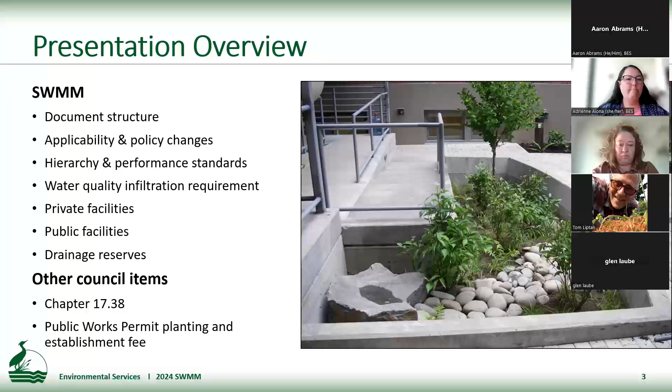So just to get us started, the Stormwater Management Manual requires stormwater management for development activities that add or replace impervious area. It applies in the right-of-way and on property. It also protects drainage ways on private property. We have these requirements to comply with our own regulatory requirements, to protect watershed health, and to meet our stormwater system needs.

Here's the schedule. The public comment period opened on Monday of this week. We're in our first info session today, and then we'll have another one next week on the 24th. The material will be the same for both of these presentations. The public comment period closes on August 19th. We'll be taking the code updates to City Council at the end of the month on the 31st. And then when all of this goes into effect on October 1st in the fall, we'll have a 3-month grace period for applicability.

So here's our new table of contents. You'll see it has a lot more chapters and sections than before. The goal here is to make it faster and easier to find the information that you're looking for. I'm going to highlight a few changes here. We've expanded the current Chapter 2 Stormwater Facility Selection and Sizing and Chapter 3 Private Stormwater Facilities across these 4 chapters. So Chapter 2 will now be focused on site evaluation and planning. This will include setbacks, infiltration feasibility requirements, and infiltration testing, among other things.

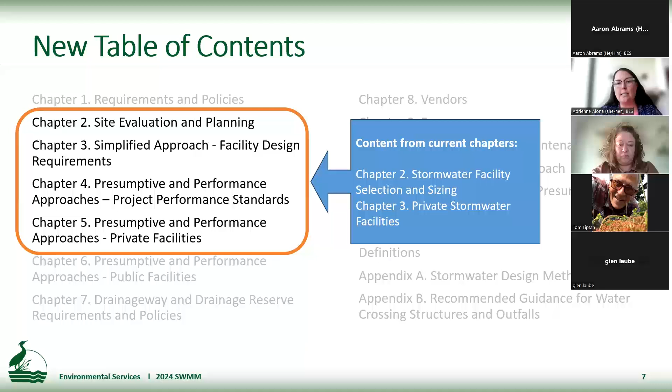Our new Chapter 3 covers the simplified approach. The simplified approach is a prescriptive design approach that is available for smaller projects that have 10,000 square feet of impervious area or less. This is the approach that's mostly used by contractors and does not require the involvement of design professionals like an engineer or a landscape architect. And so consolidating all of this in one chapter is going to make it easier for users to find this material. Because we've made that chapter, we've also separated out the presumptive and performance approach project performance standards into Chapter 4, and that'll be where more of the engineering guidance is held for those larger projects. And then we have the facility designs for those design approaches in Chapter 5.

We've also consolidated and pulled forms, standard operations and maintenance plans, and the facility details into separate standalone sections that will live at the end of the document so that they're easier to find. Right now, they're folded through the document in the chapters where you would find them if you were reading it cover to cover, but that's not how people access the manual. And so we're putting these in separate locations so they're easier to find.

Now I'm going to get into some of the policy changes. Our biggest policy proposal in this version of the manual is increasing the applicability threshold for which projects need to comply with the manual from 500 to 1,000 square feet. This threshold will be applied at the project, not just the site scale. So if you're coming through with a batch of residential building permits, this would apply to all of those as a group together. So it would be 1,000 square feet for all of them together added up, not on a tax lot by tax lot basis.

This change will decrease the number of building permits that will be required to comply with the manual by about 18%, while only reducing the overall impervious area managed by about 1.8%. And those numbers are based on review of SWMM permit data over a 10-year implementation period.

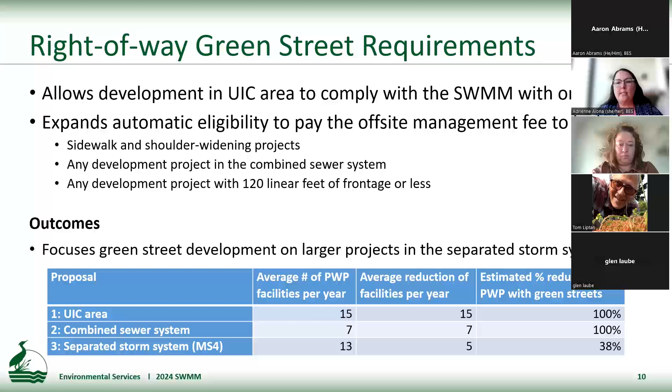We also have some proposed changes to the pavement exemption language. These are only the ones where we're changing the language. These aren't big changes, but it's mostly rewording existing language. We'll now go back to talking about standalone utility trenching projects, standalone base repair of public streets where less than 50% of the street is repaved. The big change here is this sort of mixed projects for other structural pavement repair.

So if you're doing a mix of things that requires pavement replacement, including reconstruction of a curb and the associated pavement restoration, base repair, and pavement restoration for excavations and trenching, when you've got a large project that has a mix of those things, when that area exceeds 40% of the road area, that's when you'll be required to comply with the manual.

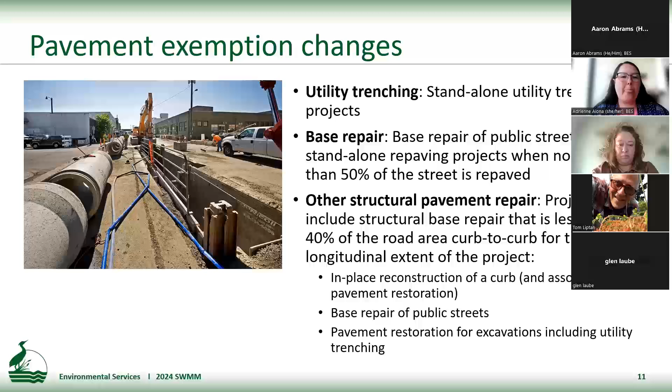Some other policy changes: we're removing the language from the manual that references the total maximum daily loads. That's because while the SWMM helps the city comply with our TMDL requirements, there aren't any additional design actions that are required for SWMM compliance to meet those requirements. So all of the standard requirements for facility sizing are the same. And so we don't need to call out the TMDL for specific water bodies separately.

We're removing the landscape non-conforming upgrade trigger. This is a trigger that results in a significant number of permit reviews, while very few actually result in an upgrade.

We're clarifying requirements for new connections and routes of conveyance. And for that in particular, we're outright stating that if you're building a new curb where one did not exist before, or formalizing a drainage system, that counts as a new connection or route of conveyance, even if that water ultimately ends up in the same place as it did before. We're also clarifying Port of Portland operations and maintenance recording requirements. So Port of Portland properties are not required to record O&Ms with the county against the property deeds. The city and the port will hold those records in our own records, not with the county.

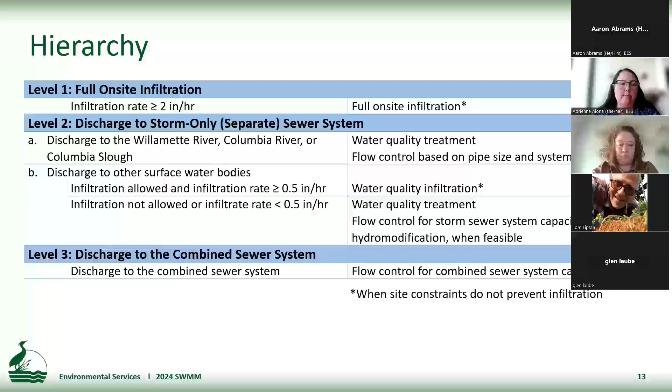All right, now I'm going to get into these performance standards. In this version of the manual, we're establishing this new terminology for performance standards, where we have like 6 performance standards and then the kind of engineering design requirements associated with them. So this is the summary of those. Kind of the key ones to look at here are the new one, water quality infiltration performance standard. That's to infiltrate the water quality storm event, which is 1.61 inches in 24 hours.

And then the flow control for the separate storm system, that is now going to be based on limiting the post-development peak runoff rates to pre-development peak runoff rates for the 2, 5, and 10-year 24-hour storm events. We've removed the 25-year storm event from that requirement. And then we've separated out this flow control for hydromodification, and that is focused on limiting the post-development peak runoff rate to the pre-development peak runoff rate for 1/2 the 2-year 24-hour storm event. And that requirement is designed to kind of protect stream channels from changes in the flows that they're seeing due to urbanization. Then the flow control standard for the combined system is not changing.

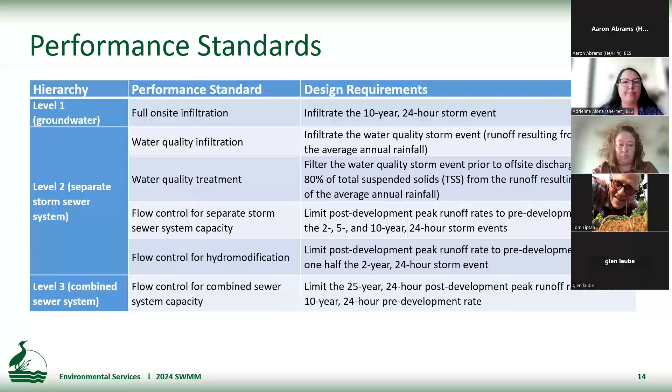So hydromodification is the change in the structure of a stream channel through usually kind of erosion and incision, because development changes the flow patterns off of a site. So water runs off differently from a parking lot than it does from a forest. And that change in the runoff patterns has negative impacts on stream channels. So we're doing it to minimize those impacts and to improve water quality.

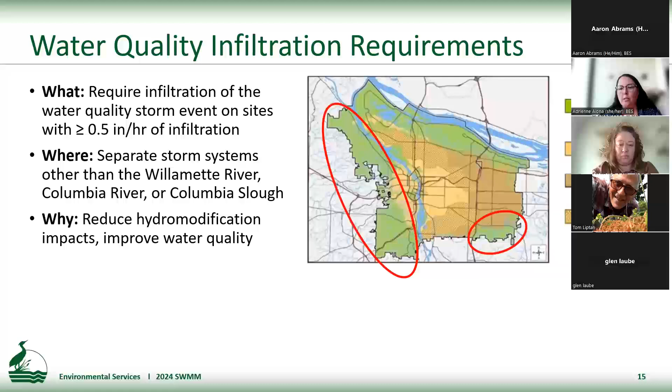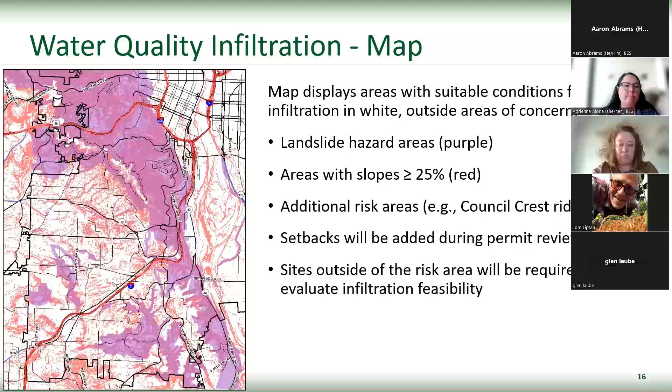The criteria for the infiltration requirement: the requirement will apply if there's an offsite connection. So you have to have the ability to connect to a storm system, which is not the case for every site in these parts of the city. The infiltration rate has to be at least a half an inch per hour, and other site constraints do not prevent infiltration. So all of the other reasons that you can't do infiltration on a site still apply. If you're within a setback, if there's contamination on your site, or if there's specific geologic conditions that are not identified on the exclusion map that can be demonstrated.

So along with this, we're also updating our water quality design storm. We are extending the hyetograph from 24 hours to 36 hours. So the duration of our new design storm is increasing by 12 hours. We're doing this to better match our actual rainfall record and particularly to better match the peak rates.

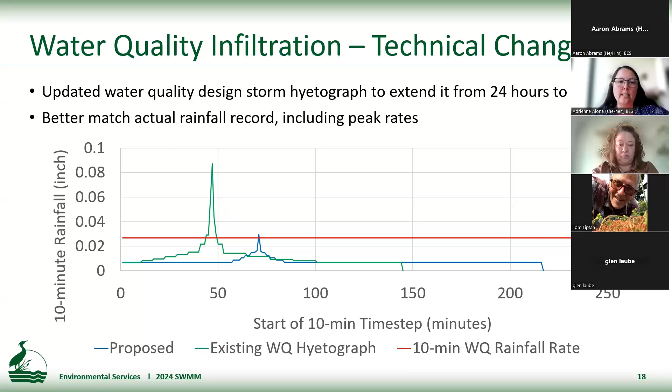So you'll see on this graph, the existing water quality design storm is in green. The proposed 36-hour storm is in blue. And then the red line is our 10-minute water quality rainfall intensity rate. So for facilities that are designed to manage the peak intensity, that's what that red line is. And then this blue line is the volume of the storm distributed over 36 hours. And we developed this through a rigorous statistical analysis of our historic rainfall record.

So now I'm going to get into some design updates to private stormwater facilities. We are restricting ponds to apply to public projects only. So we are taking those out of the list of available facility types for private development projects. We're removing subsurface sand filters as an option. This is a facility type that rarely gets built and isn't really needed. We're adding a new soakage trench detail with an overflow connection, and that will be used for when infiltration rates are between half an inch and 2 inches per hour. And we provided more guidance for large bioretention systems.

We've updated our setbacks for all infiltration facilities, setbacks from steep slopes. We've changed the definition of steep slope from 20% to 25% for the application of SWM setbacks. We've reduced the setback requirements for grade breaks and slopes between 25 and 50% that are less than 20 feet high. So the new setback requirements will be based on the height of that grade break. So the setback will be 5 times the height of the grade break or 100 feet, whichever is less.

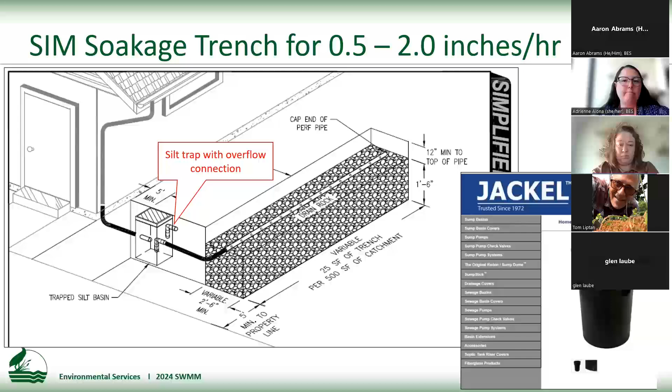We also have some changes for planters and basins for our water quality infiltration facilities, for planters, basins, and soakage trenches. So all infiltration planters and basins with under drains will now have an elevated discharge pipe at all infiltration rates. This will facilitate infiltrating additional volumes of water. We are adjusting the depth for our simplified approach aggregate layers. They are changing to be 6 inches of drain rock for the under drain pipe and then 3 inches of gravel for that filter layer. We're allowing corrugated HDPE under drain pipe and encouraging recessed under drains for our presumptive and performance approach facilities.

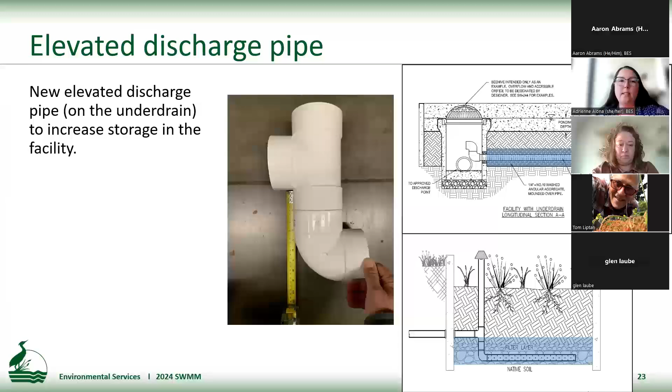Here are what the draft details look like for the elevated discharge pipe. Here's a potential elbow configuration to accomplish that. You'll see that elevating that discharge pipe increases storage in the facility, and particularly in these slower draining soils where this requirement will apply, that will really help those facilities infiltrate the amount of water that we're looking for them to do.

Here's the HDPE corrugated slotted drain pipe. This is a new pipe that we are adding as an acceptable underdrain material. The understanding is that the current underdrain material can be somewhat difficult to obtain. And so this material is widely available and will be acceptable for use for underdrains in private facilities.

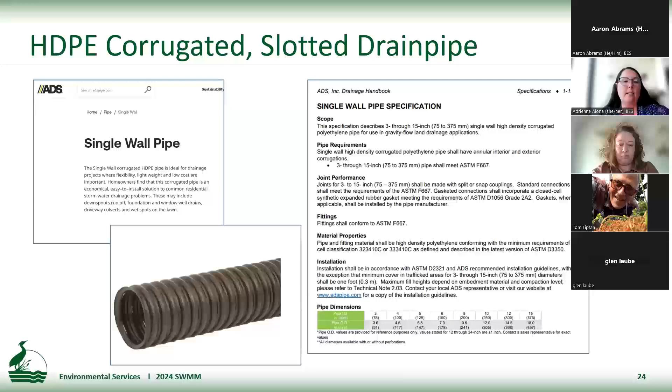We're going to be encouraging, but not requiring, the use of a recessed underdrain in presumptive and performance approach facilities. This is an underdrain that's placed in a trench below the facility instead of within the blended soil in the facility. It'll increase the soil volume within the facility and hopefully be better for plant health.

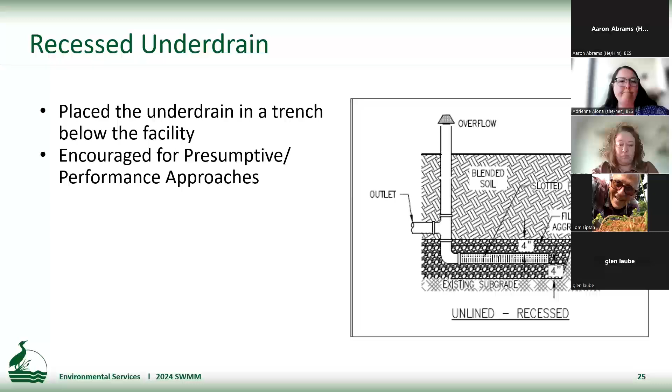For eco-roofs, pervious pavement and dispersion, we have some changes to these. We've updated and included guidance on how eco-roofs meet our specified performance standards. So how do you credit an eco-roof for water quality treatment or the water quality infiltration requirement? One key example of this is that the Central City eco-roof requirement requires 60% coverage of a roof. However, if you are in the separated storm system and water quality treatment is required, that 60% coverage does not meet that standard for the full site because the other 40% of your roof still needs water quality treatment.

We are recommending pavers for pervious pavement on property to avoid systems being paved over, particularly with pervious asphalt. It is often difficult to tell that that is a unique material. And so there's concern that repaving projects will result in switching over to standard asphalt, and then that will cause significant problems. We also have new guidance for allowing pervious pavement on slower draining soils.

For dispersion, we're clarifying that downspout splash blocks are by exception only, and updating our trench dispersion requirements and moving those from the appendix to the body of the SWM. Trench dispersion is a facility type that allows you to spread flows across a hill slope, and it serves as a discharge point for sites that do not have access to a storm system and cannot infiltrate the 10-year event. This was formerly called upland dispersion in the appendix, and we've just added a little bit more detail and guidance to that design approach and brought it into the body of the SWM.

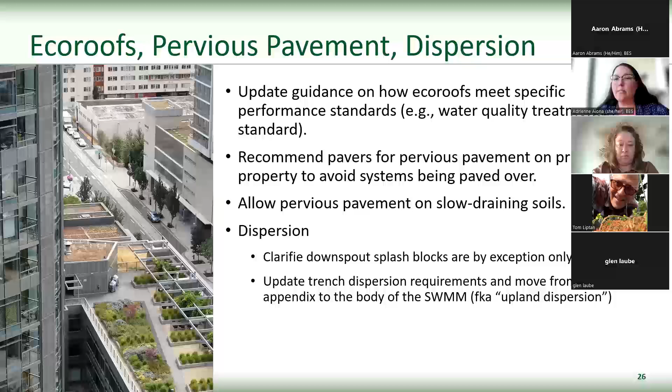We have some process changes. We are shifting operations and maintenance and drainage reserve notice of condition form recording. We're shifting the responsibility from the permit applicant to the city, and we'll primarily be implementing that in Multnomah County to start. But this should reduce the number of back and forths between the city and permit applicants, because often the operations and maintenance plan recording requires a few extra check sheets during the permit review process. To accomplish that, we have a new recording fee that's just a pass-through for us to cover the costs of recording at the county.

We are also creating the authority for BES to require construction certifications from the designer for sites where city staff cannot perform inspections. A key example of this is if you have a site that's doing flow control with an orifice, and that orifice is within a maintenance hole that city staff do not have the ability to access, or it would require confined space entry. For those sorts of situations, we will require that the designer provide a construction certification. It's similar to a special inspection, but that has a very specific definition, and so we're using a different term here.

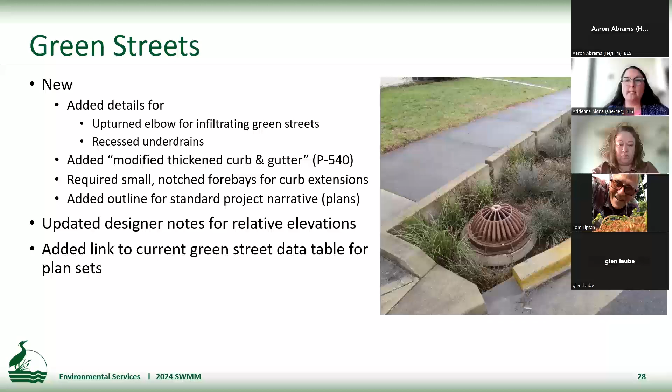We've updated designer notes for how to handle and communicate relative elevations within the facility to facilitate accurate construction. There are a lot of critical elevation points within green streets that are necessary for them to work properly, and proper construction is an ongoing challenge for these facility types. And then we're adding a link to the current Green Street data table for plan sets so that that is easily accessible on our website.

We have some significant improvements for lined facilities. We have some new details for liner attachments that better show how to attach liners in facilities with check dams and multiple cells. We have a new requirement in the construction specifications for the contractor who's installing the liner to test the seam seals after they're installed. They use compressed air to find any gaps in those seals. I guess it's a standard service that they provide that Portland has not required in the past.

We're also adding a requirement to protect the liner with geotextile fabric to help minimize the risk of puncture, particularly between the liner and the aggregate, the drain rock in the bottom. We're adding a new CG3 catch basin detail to use in lined facilities that are less than 5 feet wide instead of using a beehive. Trying to fit a beehive within a lined facility when it's only 5 feet wide doesn't leave enough space around the beehive to install the liner correctly. So instead, the catch basin will move to the edge, outside of the facility footprint. So you can have a nice rectangular box for your facility to install the liner, and then the catch basin will be on the edge at that planter wall.

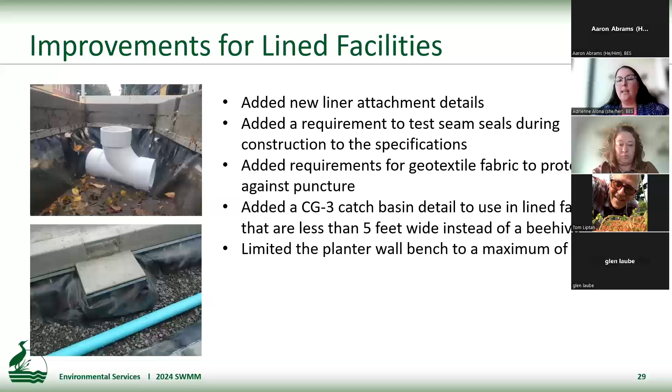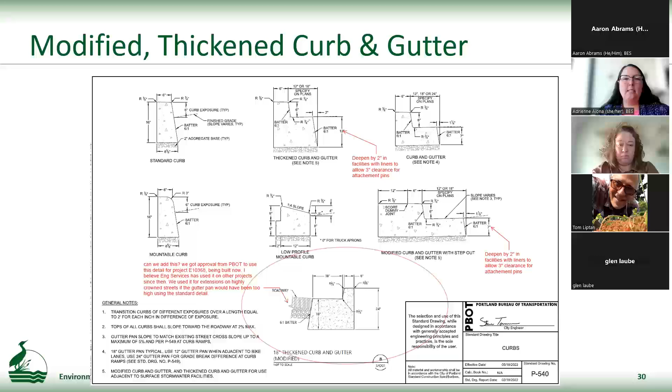We have some changes to public sumps for our UICs in the public right-of-way. We have 2 design approaches. The first is managing the 10-year peak flow with a safety factor of 2. This is the current design approach for public sump systems. The second, which is new, is to manage the 24-hour 10-year design storm with a safety factor of 2. That's a more modeling-heavy approach. It's been available for private sumps for a long time, and we are now adding this to our public sumps.

We have new design guidance and requirements for water quality sumps in the MS4 and the separated storm sewer areas. These will be required to manage the water quality design storm with a safety factor of 2. And because they are only infiltrating the water quality design storm, 1.61 inches, instead of the 10-year event, 3.4 inches, those will be required to be an inline configuration with a piped overflow back to the storm system.

We have new language to require checking for depth of groundwater when installing a second sump in series, to make sure that the first sump has an adequate separation from groundwater before installing the second one. And then we'll have an updated sump data table. I don't think this is it.

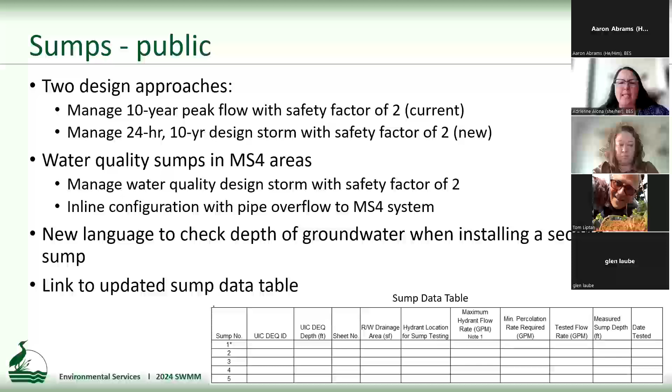We have new guidance. This is a brand new section for large bioretention systems. It's still general guidance at this time, and draws on the experience that the city has. We've been building more of these recently, notably on the Capitol Highway project. We have guidance on recessed underdrains and the importance of spreading the flows across the facility. Since these are so large, we really need that flow to spread out across the whole surface area so that the whole facility is activated and we're getting that infiltration through all of the soil.

And again, there's a particular focus on the need for an adequately sized forebay, to keep as much sediment out of the facility as possible, to ease future maintenance and keep the plants healthy and safe.

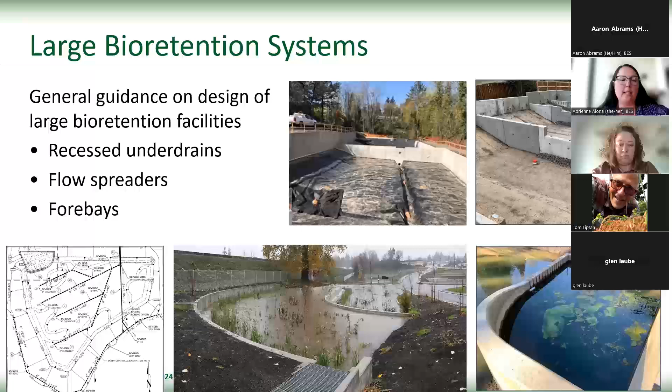Some other changes for filter strips in the right-of-way: we are promoting the use of a grass seed mix. The current language in the manual implies that you're required to plant it like a green street, and that's not really the intent.

We have 2 soil blends for green streets. The current standard blend is for simple unlined infiltration facilities. And then we have a new high fines soil blend for lined facilities, or facilities where the soil is not sitting on top of native soil, so when there's an underdrain, or when there's gravel across the entire bottom of the facility. This high fines blend we found better supports plant health because it has more mineral fines for the plants and also really helps retain moisture. We have also updated our plant lists and planting templates.

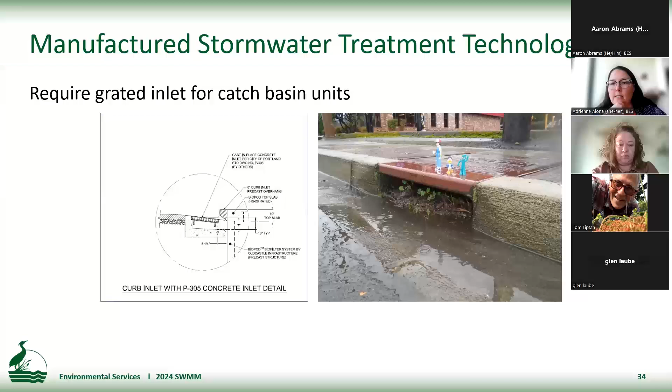For manufactured stormwater treatment technologies, we're going to be requiring a grated inlet for catch basin units. We're doing that based on experience we've had with some installations on Beaverton Hillsdale Highway, where street sweeping on that road causes debris to build up within the curb inlet and prevents water from getting into those facilities, so that they're not actually functioning.

Along with this, we are updating the presumptive approach calculator to pull in all of these new design standards. We have the new performance standards in there. We're updating the infiltration and underdrain outflow calculations. Flow control for hydromodification is now going to be using a pre-development curve number of 72 for the forested condition.

And then we're renaming configuration F, which is an unlined facility that has an elevated discharge point. We're renaming that to combine it with configuration C, so that you now have two choices: configuration C with a flat discharge point that's level with the underdrain, and one that is elevated.

We have some improvements to our drainage reserve requirements. We have specific guidance on when to apply a wider reserve. Our standard reserve is 30 feet. The wider reserve will be applied to channels when there is an identifiable top of bank and the channel is wider than 5 feet.

We also have some more information about when a drainage reserve is applied over a drainage way. So you can have something that is identified as a drainage way, and this is when the city will decide not to apply the protections of a reserve. Within the right of way, we review protection of and impacts to the drainage way, but we do not apply a reserve on top of drainage ways that are within the right of way.

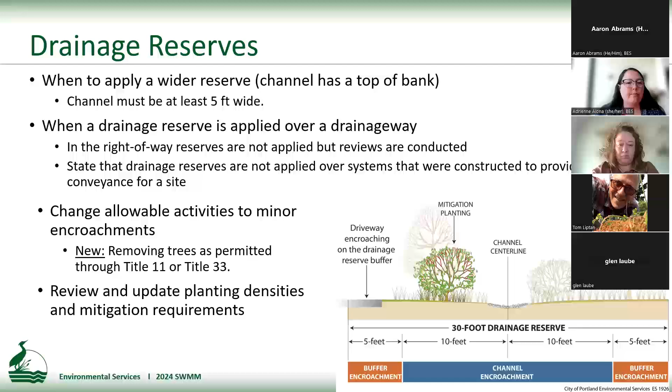We are changing the terminology that we use from allowable activities to minor encroachments. We'll still be reviewing those, but they are generally allowed with minimal review. And we are also adding the removal of trees as permitted through Title 11 or Title 33 as a minor encroachment. So BES is not taking the lead on review for that. We're deferring to the requirements and protections in Title 11 and Title 33. We also reviewed and updated planting densities and the mitigation requirements for impacts within the reserve.

So land use reviews will be conducted under the manual in place at the time of submittal of a complete application. Building permits will be reviewed based on the permit intake date, and public works projects will be reviewed based on the date concept development is accepted for review. And then capital improvement projects and interagency projects, so city projects, will be reviewed based on the 60% plan submittal date.

All right, now I'm going to get into some related council actions that are not within the manual itself, but are closely associated with it. So at the end of July, like I said, we're bringing updates to the code that gives us the authority for the Stormwater Manual, Chapter 17.38, Drainage and Water Quality. At the end of August, we have this proposal for a Public Works Green Street Planting and Establishment Period, a new fee for that. These two items aren't really officially open for public comment, but we wanted to provide information about them during our outreach work.

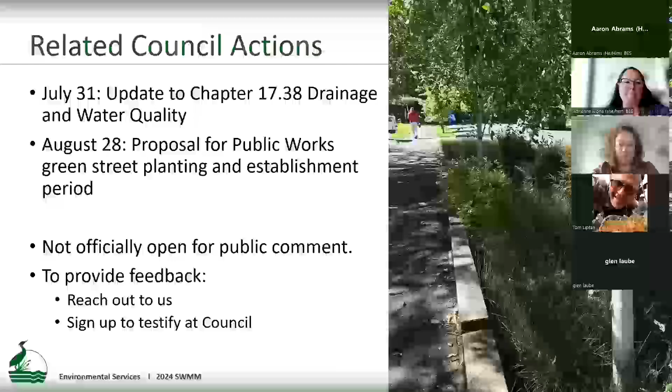However, we are definitely open to receiving comment, so reach out to us. And like anything that's going before City Council, you are welcome to testify in person or through written submitted testimony. So the code changes for 17.38 that are on the consent agenda for Council on the 31st: we are removing the 500 square foot threshold from code. This is not exactly where the change is happening. We'll be increasing that threshold in the body of the SWMM.

We're removing the non-conforming upgrades trigger. We are updating the impervious area definition to align with changes that we made in 17.36, which is the code that covers our rates and charges. And we are adding the authority to require the designer certification that I already spoke about. Then we have some other updates to enforcement language that just bring that language up to date with our current practices and language that we already have in other sections of code.

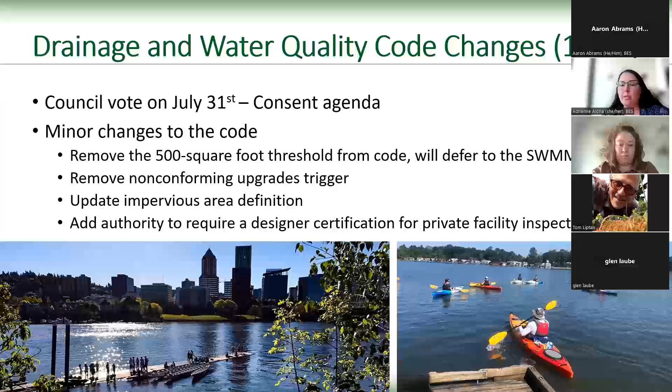Now we have the additional proposal for how we handle Green Street planting and establishment through the public works permit process. Public works permit projects that are required to build green streets must create a planting plan, plant the green streets, care for the plants for the 2-year maintenance warranty period, and then extend the establishment period if required.

Public Works permittees may currently opt to enter into an agreement with BES to provide those services instead. Our proposal is to make that required for all Public Works permit projects with green streets, shifting the responsibility for planting and establishment from the permittee to BES. We would accomplish that by creating a new fee based on policy proposals and a look at historic green street construction. We think this might apply to half a dozen or so projects per year.

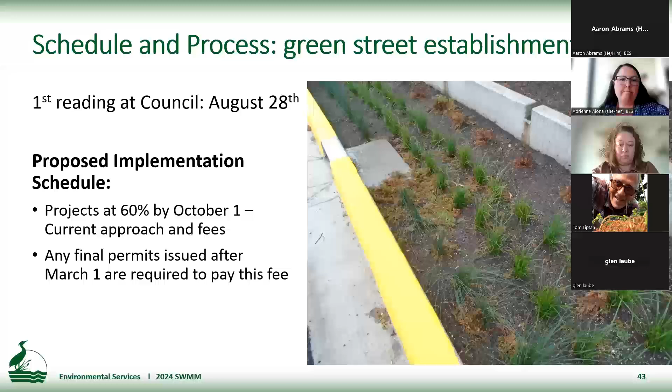The schedule, again: public comment opened on the 15th. We have our city council hearing on the 31st for 17.38. The public comment period closes on August 19th. We're taking the Green Street planting and establishment fee to council at the end of August. October 1, the Stormwater Manual and all of these updates will be in effect. And then as of January 1, all projects will need to comply with the 2024 SWMM.

That's the end. So if people have questions, I'm happy to answer those now.